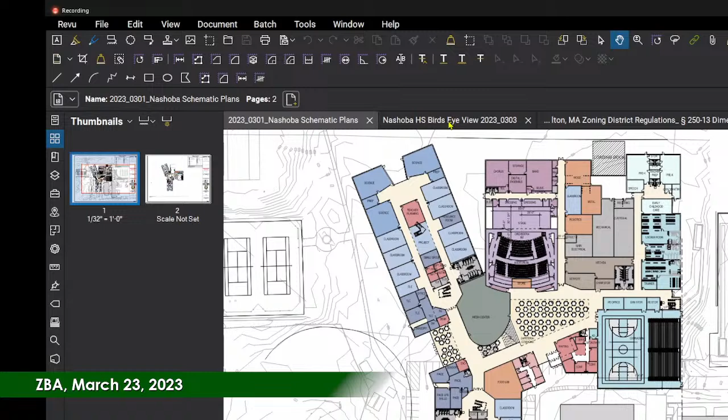Here you can see the arrangement. The gymnasium is kind of a high roof. The auditorium where the stage is, a high roof. The classroom wings are well under the 32-foot height at the moment. As I said, this was sort of a snapshot in time. If I showed you the plans and the elevations today, they'd be slightly different. And again, we are in the schematic design phase.

The importance of the schematic design phase, if anyone has not been through, most of us haven't been through an MSBA funded project. Although schematic design sounds fairly schematic, it really is not. Unlike a lot of other private projects where the budget is developed and isn't known until later on in the project, with an MSBA project, the schematic design phase and the estimate that comes out of it sets the budget for the project through the rest of the project. You cannot change the budget after that.

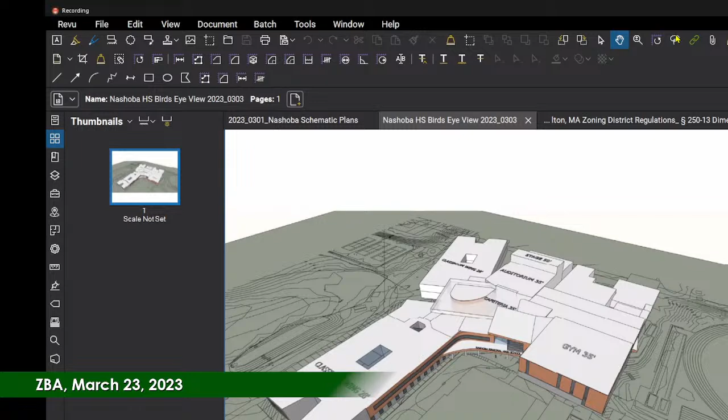The thickness of the roofing membrane and the blocking and everything on the perimeter in current codes will bring us up another almost a foot. That gets up to 34.5 feet. And then we have to consider the items that are below that truss height that might be an obstruction in the gym. And if I could show some photographs, where did I put those? The existing gym also has the same problem. Shoot. Where are my photos? Here they are.

So the existing gym, as you can see here, the trusses are just below 25 feet, like at 24 feet, but you also have underslung mechanical systems that hang down below the trusses. You've got ductwork that hangs below the trusses.

I don't think we can see your image. I'm not sure if anyone else can. Did it stop sharing? Okay. Yeah, we're stuck on Revu at the moment. It says I am screen sharing. Oh, but it's not showing the screen. That's weird. It's just like the back end of what you had up. Let me try to go in again. Share. Funny, it didn't pull it up. There we go. You can see it now.

Yeah, so in the existing gymnasium, the existing trusses are just below 25 feet. But there are other things that have to occur below those trusses, like mechanical units here that are slung below. You can see 2 or 3 feet below. Ductwork that hangs down below. There are light fixtures that are down below.

And one thing this gymnasium doesn't have that we'll have to have in ours is a drop curtain that comes down from the truss level to the floor of the gym to divide the gym into 2 or even 3 learning spaces. It'd also be used to divide the gym when you're having, say, a JV volleyball game on one side and another game on the other side. So that hangs down another 2 or 3 feet also. So if we add another 2 or 3 feet to the condition we just had at the 34.5, we wind up at about 37 feet. And that's at a minimum.

When we look at the need to have some height on the gym also, and I'm afraid to share the other photograph, I'm not sure if this will work. You see that, the bleachers? So these bleachers are about 13 rows high. We're going to be 21 rows high in our gymnasium, which is going to put the top seats of the bleachers at about 18.5 feet high, as I remember from the Hussey catalog. And what we'd be afraid of is that someone could stand on those bleachers and reach up and touch the structure above and grab onto it. So we want to make sure that the structure is high enough that that doesn't happen too.

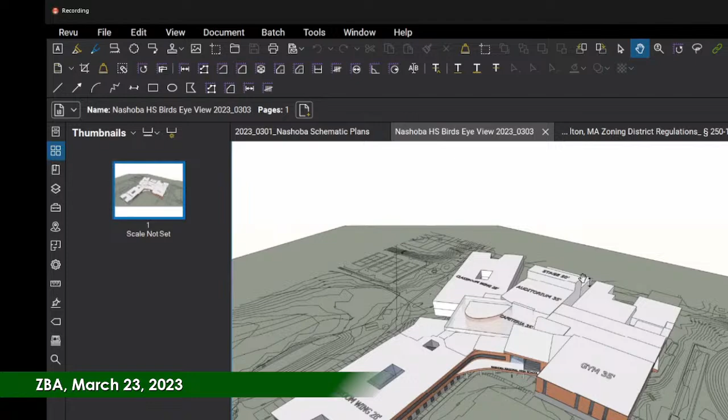And the seating area for the auditorium, if I can zoom in here, would also be at about 35 feet. That's only to get the clearance we need for the stepped tiers that come up from, I call it the bowl, the bottom recessed area at the face of the stage, going up to the top. If you've been in the existing auditorium, you know what I'm talking about, where the seat levels rise at a steeper grade at the back.

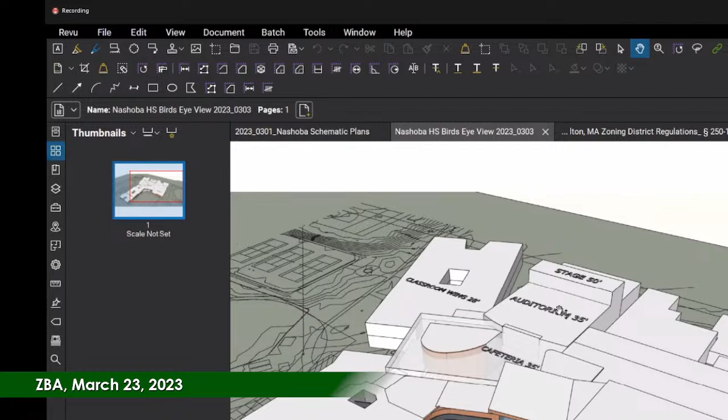And the existing auditorium also currently exceeds the 32-foot height, as does the existing gymnasium. There are a few places in the existing school that also exceed the ordinance. I'm not sure whether the ordinance came into effect before or after the 2000 addition renovation project took place. But there are several places in the existing building that are also just above that limitation.

What prompts the 50 feet again? What exactly does that allow? The 50 feet allows space above the stage. The proscenium opening in the stage is going to be about 23 feet high, I believe. When you have sets that have to go up and down in the back, and projection from the back, it allows that to go up to a place where it isn't seen from the audience.

There are catwalks that cross above the proscenium opening, the big opening at the front of the stage, and for the headroom for that and for the lighting, the 50 feet is basically the minimum that we can have.

It is basically the height we would go to before we have to change over to make that part of the building into a 3-hour enclosure. Right now at 50 feet, it doesn't have to be a 3-hour enclosure. And I think that's partly the reason that's such a typical height for stages and auditoriums in new schools throughout the state. Just to mention that.

What does a 3-hour enclosure mean? That the concrete block wall that's around the stage area would be rated for 3 hours of fire protection. And that the stage would have a drop curtain at the front of it, an asbestos type curtain that would come down in the event of a fire and separate the audience side from the stage side. When you're under 50 feet, you do not have to have that. You have to have an hour rating, and you do not have to have a drop curtain. There's a big step in cost when you go above 50 feet.

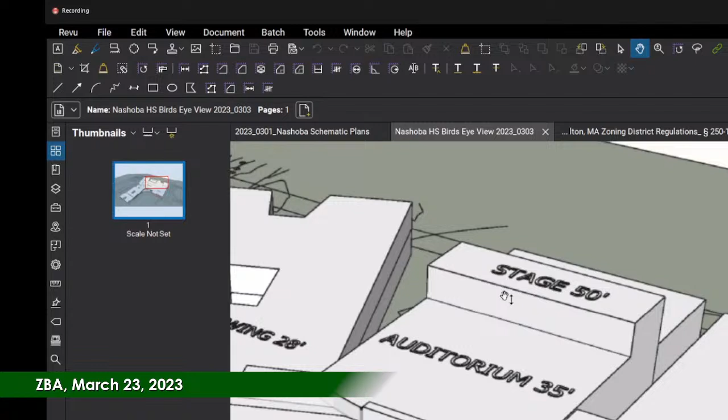And we have a theater consultant that we're working with who's done most of the theaters we do in our firm for schools from New York City. And this is the standard way we've done stages in schools for probably the past 10 years. Just to mention that the building is what's termed a construction type 1B, which means all the steel in the building is spray fireproofed with a protective coating to get a rating of 2 hours throughout the building. The existing building is not. The existing building is unprotected steel. It's a construction type 2B, which means that it's unprotected steel.

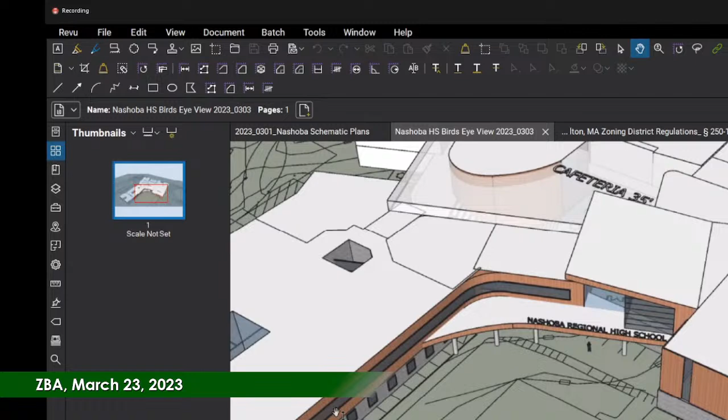And just to mention also that the other part of the zoning ordinance in that same section was to require that the building only be 2 stories high, and that's what we have, 2 stories in height in the classroom wing, and that the second floor can't be more than 15 feet above average grade. Right now we have a 14-foot floor to floor height, so we would be under the 15-foot finished floor elevation, and we would comply with that section of the code throughout the building. The second floor, nowhere in the building, would be higher than 14 feet above grade. The only thing that would be higher than what was allowed in the ordinance would be locations where we have higher issues with the roof.

And I want to stress that we're still in the process of going through designs, that things are changing, as I said, daily, and that we may have other conditions in other parts of the building that may also need this kind of relief from the zoning ordinance. I'm not sure of the genesis of the ordinance. I have a feeling it was probably more geared towards residential construction, which is the typical thing you have in the town. But again, this building is going to be fully spray fireproofed to the point that the code allows it to have unlimited floor area.

Usually, depending on the amount of fireproofing you have in a building, you're restricted in how much floor area you can build. But in a 1B construction type, you're allowed to build unlimited floor area in the building. So it just goes to show what the capabilities of that system are. Yeah. So the height, have you talked with the fire chief about that 50 feet high?

I believe in our town, we may not have fire vehicles that can reach that. We've had a sharing agreement, but even with that sharing agreement, will that accommodate a 50-foot high structure? Will they have to be able to go up to over 60 feet to get above it? I don't know how that works on height. We haven't reached out to the Lancaster Fire Department, and in previous discussions with Chief Legendre, there is a mutual aid agreement with the Lancaster Fire Department, and because there are areas in the existing building that exceed the 32-foot height, I understand that Lancaster responds to calls at the high school now.

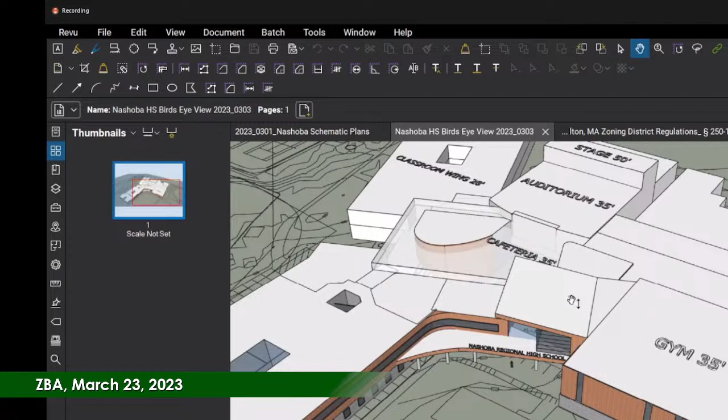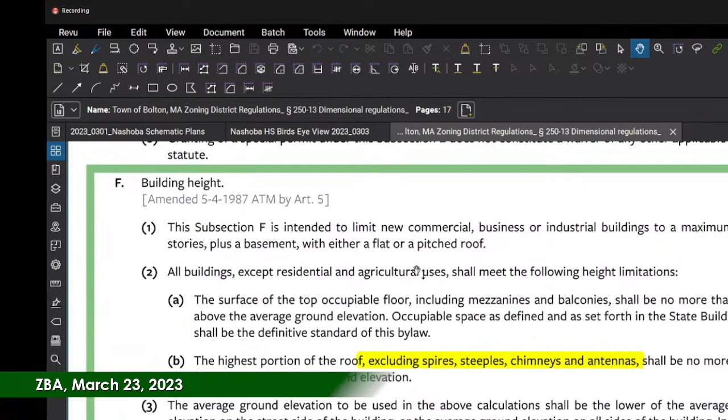Because all we would ultimately handle from the board's perspective is if we had an application that came to us that said, we need relief from the height restriction. If that height is 35, but then you have 10 feet of something else on top of it, is it now 45? You know what I mean? And then again, for the firefighting aspect of it, if they had to get to the roof and now there's something 10 feet higher, we just want to be sure that we're proactive.

Yeah, so this is, I hope you can see this too. This is the section of the zoning ordinance that we're referring to. So the first portion being 2 stories high, we obviously comply with that. The second part defining the height limitations, no more than 15 feet for the second floor elevation above average ground elevation. It's interesting to note that when you go from the grade directly adjacent to the existing school up to the roof line, certain places are a little bit above it. That discussion wasn't accounting for mechanical units on those roofs. That's just the parapet at the edge of the existing building roofs.

But where it talks about the average ground elevation, the ground elevation around the building, because the existing school slopes down from east to west, it's actually a floor lower on the west side. And so that drops the average ground elevation down about 6 or 7 feet.

And if you were to add the 6 or 7 feet to the 34 feet or whatever they are above grade now, then the average elevation would put them at like 40 feet above. And I'm not sure, that's why I think that this is more geared towards a residential application, because the actual access to the building on the adjacent grade is different than the average grade around a building of this size, whereas average grade around a building that's a house is a little bit different in the ability to get around the house with a fire lane or something like that.

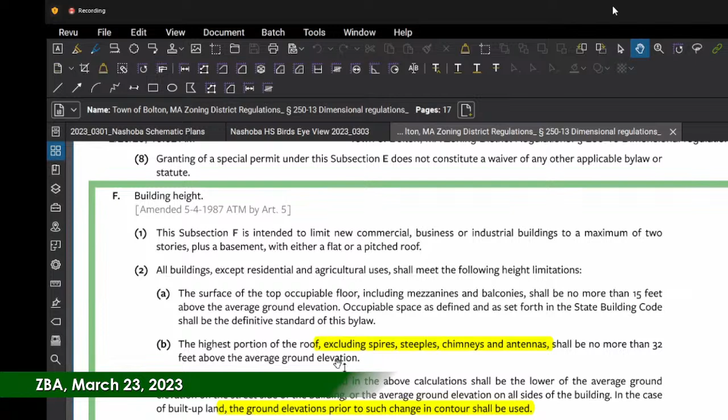And realistically, I believe you guys intend to air condition the high school and stuff like that. So that completely changes the dynamic. I'm sure people were not thinking about that in 1987. And also the building, as I mentioned, other than being heavily fireproofed for the structure of the building as a building type 1B, it's also fully sprinklered, which in residential construction is also something that would not happen.

So being completely steel framed, fireproofed, and sprinklered, I don't know, you mentioned 87 or something, but I don't know whether this was ever intended to be revised, or if it was developed with this kind of a building in place. And I don't know about the existing high school, if they received any variances for what they were doing, and how that married in with this, if this occurred after the high school was built, if they were excluded.

In 2009, we had a public hearing on the new public library addition, and that was over the height of the code, and that was an issue we dealt with as far as issuing variances. So yeah, it's certainly in this century that we've done work on public buildings with overheight situations. Right. Or setback, I think, were issues too on that library. Yeah, they were. Right. So that's Brad Reed, who's one of the board members, just speaking.

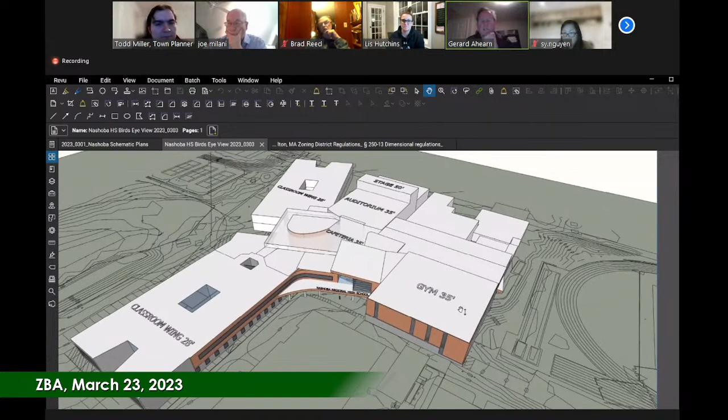Do you know, Brad, just because I'm not expert there, with regard to auxiliary equipment on top of the heights, would that factor in as far as how high they would have to stay? My concern would be what's in that auxiliary pod. If it's something that could cause a fire and we don't have firefighting equipment that can reach it, then that's an issue. Yeah, right. That was my question. The equipment on the roof, you mean? Yeah, like you got a bus size structure on top of 50 feet. It now makes 60 feet.

I'm sorry. Go ahead. They do have issues with air conditioning. So it's something that I think at least should be run by the fire chief. Yep. We do have an office park downtown. I don't know where the air handlers are, but I suspect they're on the roof. So just a question: what is the situation if you're going to have something the size of a bus, which has a bunch of compressors and other things in it? Then certainly something we ought to look at.

Yeah, and to the point, is it possible, and I know you guys are changing this design constantly, so this might be a hard ask, but is it possible to understand where you would intend to put things on the roof, and also where the roof access points would potentially be? So you probably have one or two on the gym or beside the gym. And that's 35 feet that you were just on too, right? Correct. And so you'd be adding height to that with these units.

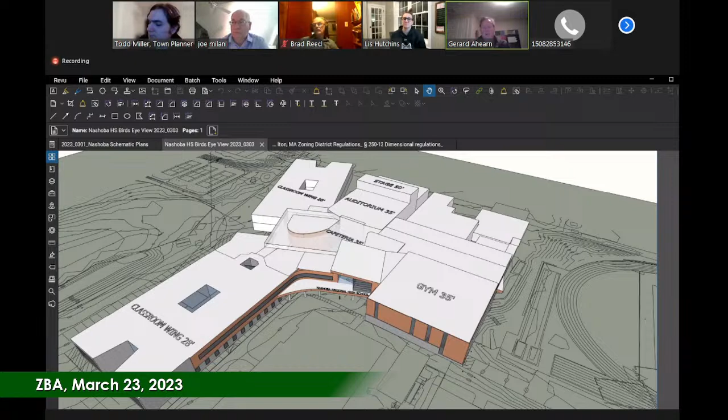I was just wondering, have we come across the Dover Amendment for anything that's been proposed in the town before? Yep, we did. Because the Dover Amendment covers educational, religious, agricultural, the facility down on Main Street, the mental health facility that had the goats in the barn and whatnot. That was a Dover Amendment process where one of the allowed exemptions they spoke to was the animal therapy type of aspect. But there's been nothing municipal or governmental that's been applied.

If I recall, when they were doing the new library or expansion it was brought in, but I think they ultimately went the variance request. Okay. So it's come in front of us to consider, but I don't recall that it was fully used as the Dover exemption. Thanks. I'd go back to read the notes, or maybe Todd could double check that, but I think ultimately they went to the board so that town members could have an opportunity to be part of the public hearing process. Yes. And to the chair, if I may.

In my experience, roughly 10 years across several different communities throughout the state, it's not quite the standard, but more often than a coin toss, you tend to have built into the bylaws or ordinances matters of municipal exemption for issues just like this, whether it's a police building that's a little bit too tall or any other public service building, or for educational uses as well. Anything that serves municipal use tends to be exempt from these sort of processes. It's a little atypical that Bolton doesn't have any of that language in place, and it's something we would do well to consider into the future. Mm-hmm. Yeah.